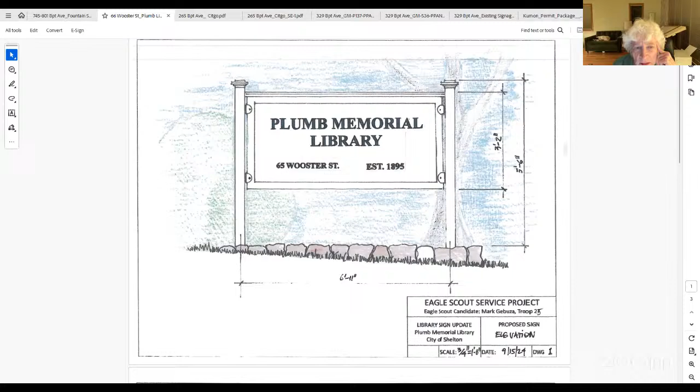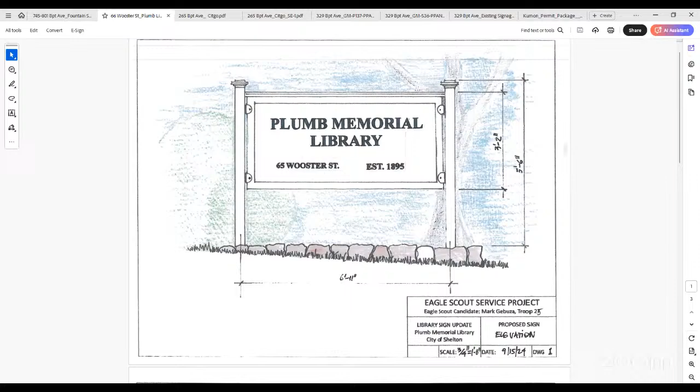Ms. Castro, has a revised layout come in, or has it been conveyed to the Eagle Scout? It was conveyed to the applicant. I've not yet received one. I will note that a revision needs to be submitted to the application prior to approval. Okay, and the other pages with this particular application.

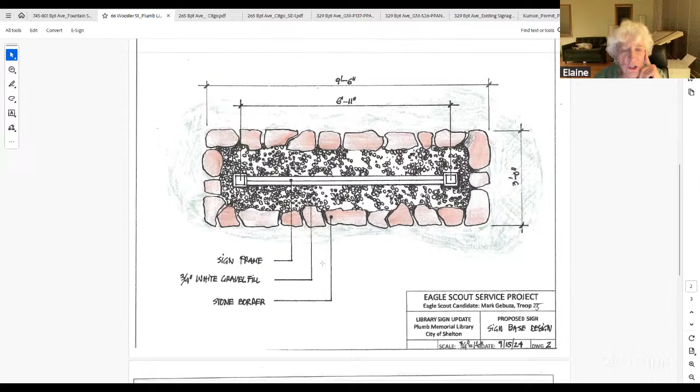Didn't we want to know where it was located? Oh, that's true, yeah. I don't think there was a location shown on the building, on the lawn where it's going to be posted. Okay, is there anybody here from the library? Yes, one moment, I will add in Attorney Bellis, who's representing.

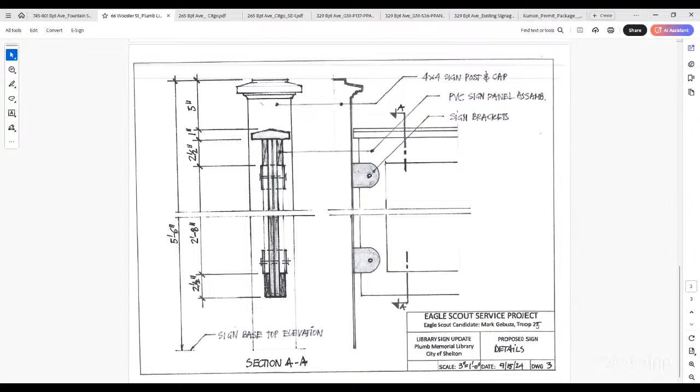Good evening. Good evening, Attorney Bellis. Just identify yourself for the record, please. Sure, I'm Attorney Stephen Bellis. I'm on the Board of Directors for the library, and I'm helping this Eagle Scout with this project.

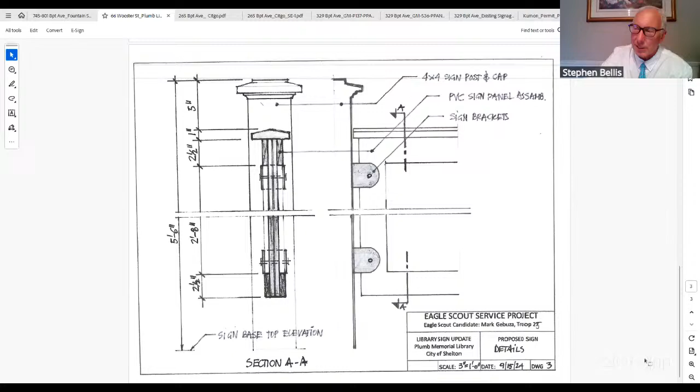He has to have it done by March because he turns a certain age, 18, and then he can't do it after that particular date. So I suggested that he get his application in. I was hoping he'd be on for the meeting tonight, but I don't see him.

I agree with the commission that the number should be on top, and I will tell the Eagle Scout to put the street address on the top. We were hoping this would be a learning experience for him, so that's why I didn't say anything prior to the meeting.

Could you also find out if there's any special reason why we couldn't spell out 'street' instead of abbreviating it? Yeah, I don't see a reason. He's engraving this, he told me. I was gonna ask, is he physically doing this? Yeah, he's doing the signage. Sure, I don't see a problem with that.

We usually just put the number on top, right? Usually, yeah. You know, it's so close to Peary Avenue, it could be a little confusing, so I think having the street name on it is a good idea. Okay, fine, I'll tell him.

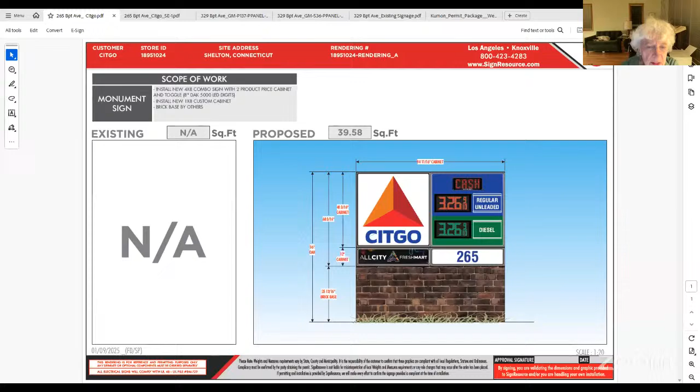Yeah, not a whole lot. I guess we wanted to put that 265 on the top—that's the address apparently—and let them know that All City Fresh Mart, if they wanted to take the whole space across the bottom, that would be okay. That's a good idea, it's a little hard to see.

To tell you the truth, with the 265 down there, at first glance I might think that was the price of gas. Well, exactly, really good point. Yeah, you're right.

Okay, is the applicant with us this evening, Ms. Castro? I do not see them, but they were contacted, and they were going to speak with the property owner and go over the revisions. I have not received them yet.

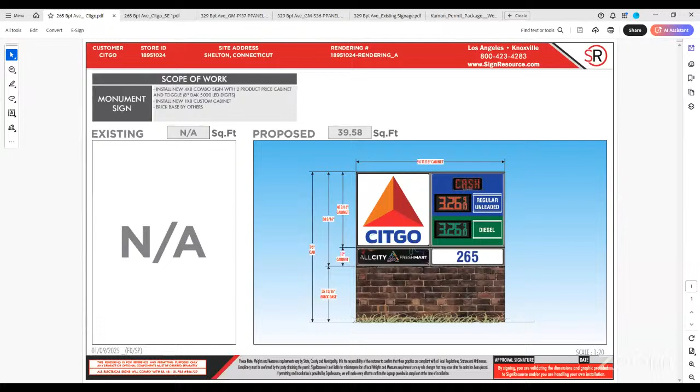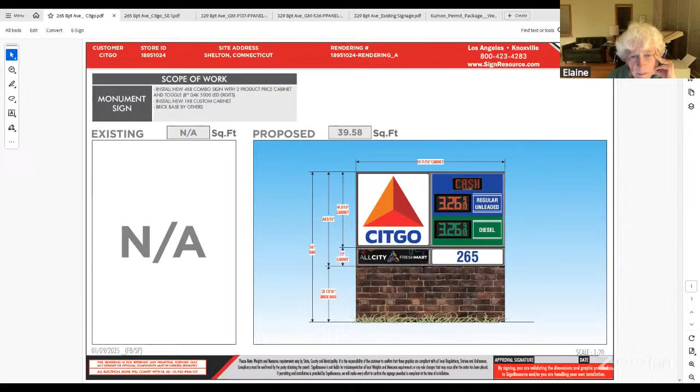So does the commission want to table this? I think so—it seems inconsistent. I think it was a special situation with the previous sign. I think they could make the revisions and let's take a look. All right, so is there someone that wants to make a motion to table?

Commissioner Ticky will motion to table. Okay, there's a motion to table from Commissioner Ticky. Is there a second?

I'll second. Commissioner Morrow has seconded it.

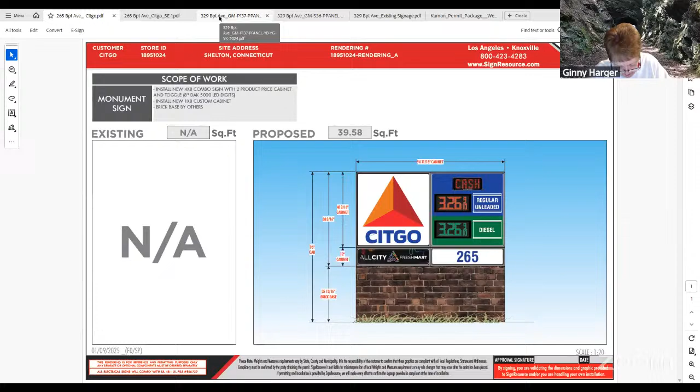All in favor of the motion to table the sign application for Citgo, please signify by saying aye. Any opposed? Any abstentions? Let the record show the vote was 6-0 with no commissioners voting nay and no commissioners abstaining.

Number 5, D'Addario Motors, 329 Bridgeport Avenue. Commissioner Amato: these signs are in the same place, same location, same size, just kind of modernizing the look. I don't know if we have a comparison, but we thought they looked good.

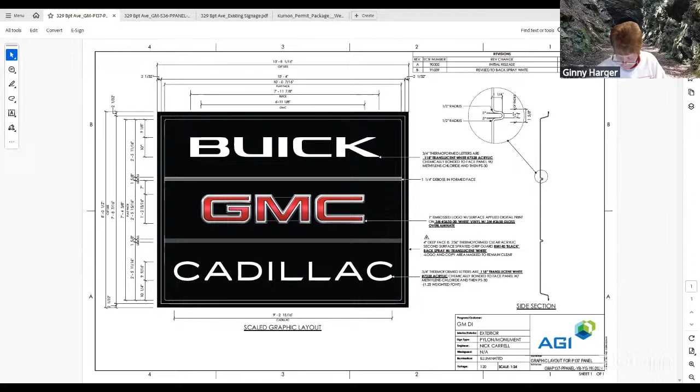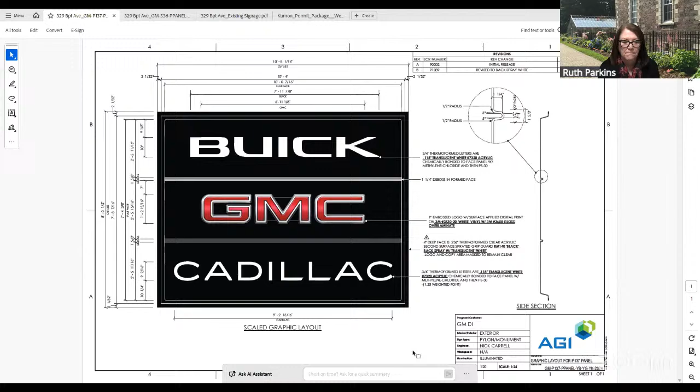There's more than one sign there, I think, right? Yeah, I'm trying to pull up the map to show the reference. This is the first sign. This is the second sign. And I will share the current street view. So they are only taking over what is already existing in these two locations, replacing.

The one that's furthest out to the left, right now there's 4 lines, but now it's only going to be 3. And the one on the right, instead of having all that, it's just going to say certified service. Okay, any questions for staff or for Commissioner Amato?

So Commissioner Amato, was the recommendation to approve as submitted? Yes. Is there anyone that wants to make a motion? I'll make that motion to approve as submitted. Is there a second? Commissioner Ticky will second. So the motion made to approve as submitted from Commissioner Kelly, seconded by Commissioner Ticky.

All those in favor, please signify by saying aye. Any opposed? Any abstentions? Let the record show the vote was 6-0 with no commissioners voting nay and no commissioners abstaining.

Okay, last one, Kumon at 698 to 708 Bridgeport Avenue, and it looks like it's taking up space at 702 Bridgeport Avenue. Commissioner Amato, what's the recommendation of the zoning subcommittee?

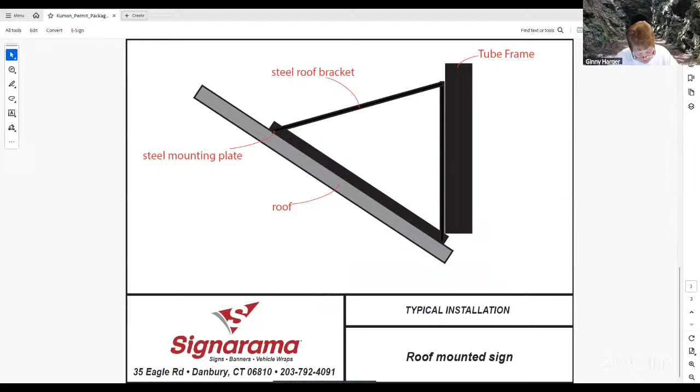I have the applicant added on if you would like to discuss. My recommendation is to take those off of the glass panels, and if they want to have both the phone number and the website, one of the phone numbers on the glass door changes to the website.

It should be fine next to one another on the blue, that's fine. No, on the door, on the white, otherwise we're starting a whole new style. That's too much writing.

The Kumon name is on there 3 times. The phone number's on there at least twice. Well, it's on both doors and in the blue panel. So, yeah, 3 times. Yeah, I agree.

That's enough, and then all the writing there - 'the world's most successful after school learning program' is the one on the left. The one in the middle says 'an academic enrichment program, preschool through high school,' and the one on the right says 'free assessment.'

I don't remember other tenants having this much coverage. Our regulations allow only a certain amount of square glass footage, right? Yeah, I mean if you look to the left of that, somebody's got an awful lot of stuff in their windows as well. I think that's the wine store, isn't it?

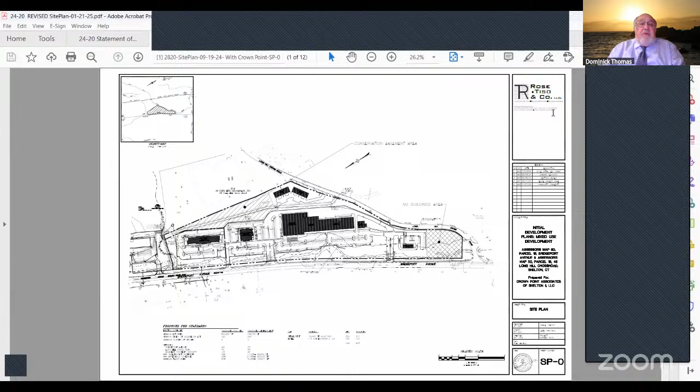I will state that I modified the statement of uses and standards to include the changes that were in the site plan. This is the revised site plan. I just want to blow it up a little bit for you.

To review the significant changes in the site plan itself, the client has agreed to have a no-build area in the pad that was down in this area. The client has agreed, as was explained at the last hearing, these buildings in the center were reconfigured. Pat Rose is here to explain again how it was designed to create a different flow throughout.

On the top area, the revised plan moves the PDD back to the back boundary and includes 8 townhouses, similarly in design to Hawks Ridge, which after discussions with them created, as Attorney McCann said at the last meeting, a buffer that they proposed. I will let you know, and again, Manny Silva and Pat are here to explain.

The WPCA engineers have been going back and forth with our engineers, and we believe we have finally resolved all the technical issues with respect to the relocation of the sewer line. Part of the proposal then says that this crosshatched area here will be a conservation easement to allow it to grow in its natural state, with the only exception being the road, the service road and sewer line that will serve the newly relocated sewer line.

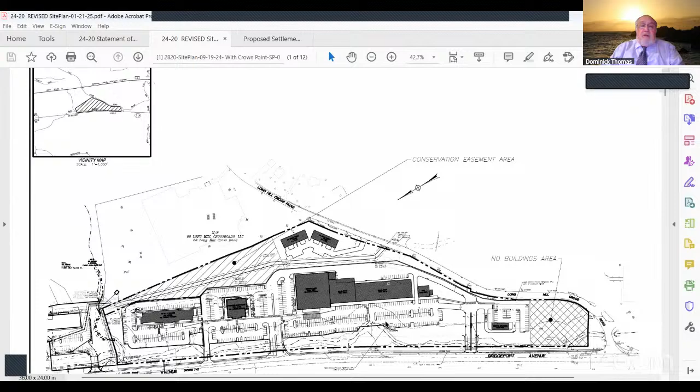In addition to this, there is a substantial buffer planting, as you saw, but most significantly, efforts will be made to go to wetlands in order to have a connection from Crown Point Center into here, which was part of the approval of PDD 48. And that connection would then serve as the construction entrance.

And after a period of 5.5 months from the approval of the final site development plans, there would be no more construction vehicles entering from Long Hill Cross Road, except for the construction of the townhouses. That's basically a summary of the changes in the plans that resulted.

The agreement does have other provisions detailing the time frame to put in the buffer, which is a substantial evergreen buffer, but it does take into account field conditions, such as the fact that we are subject to Aquarian to have the water go on the site, because you certainly don't want to plant landscaping without having water to maintain them. But again, all of these things have been taken into account.

I will also note for the record that we just received and are ready to now file with wetlands. We received the extensive wetlands report from our soil scientists, so we are ready to take the next step in that. And that's my summary.

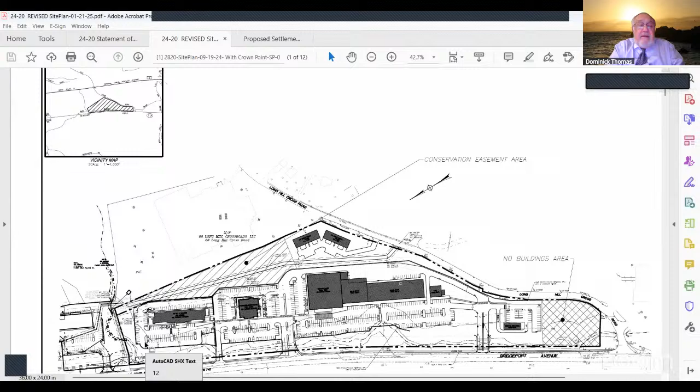I can stop sharing, and certainly if you want a more detailed explanation, Pat is here and he can screen share, and he has the color site plan that I'm sure he can share with you if that's what you wish. Sure. Any commissioners have any questions before Attorney Thomas turns it over to Mr. Rose?

Madam Chair? Yep, Commissioner, go ahead.

Cristiano: I believe an outstanding question from the last time we met on this application was the residential units on the upper portion of the pad, that perhaps the commission was not in favor of moving forward with this application if those were going to be considered. Where are we on that position?

That is something that I agree with. I don't really care for a residential component to this. I understand the logic why the applicant would want it, but I'd rather that whole section up in the back be left, say, in a natural state. And there could be certainly a replacement of a lot of the brush and trees that were taken down to prepare the site. Or it could be used for light industrial as it was intended.

Or it could be, yeah. They said they were going to extend the PDD to the whole piece of property. You're right, that's exactly what they said. So I personally would think if we're going to reject that area for housing, we should have them extend the conservation section through there, make that a permanent part of the PDD.

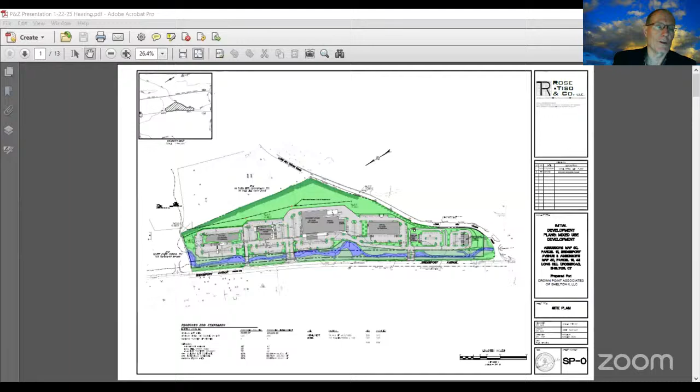Attorney Rose, is there something in particular you want to start off with? I don't have anything specific, but I can give you a bit more definition as to what we're doing. This was the old plan. Let's go back. The old plan has changed significantly.

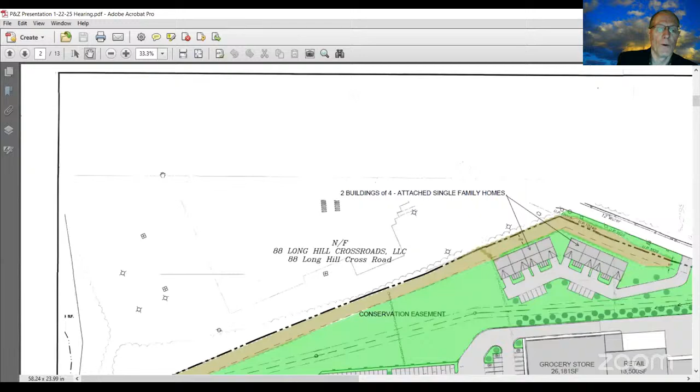What we'd be talking about is this line along here, where we would change from the PDD to the LIP. So this whole section on top would end up being LIP.

I don't know if Dominic has the numbers. We did this calculation previously when we were looking at just making the PDD the back of the retaining wall one time. I don't have it off the top of my head or on the drawings I have with me right now. I believe it's about 4 point something acres, probably between 4 and 5 acres. Yes, that whole rear area.

Where it says conservation easement, all the way to Long Hill Crossroads. What we did is with that area, it's a little under 2 units per acre in the computation, but rounding off to 2 units per acre.

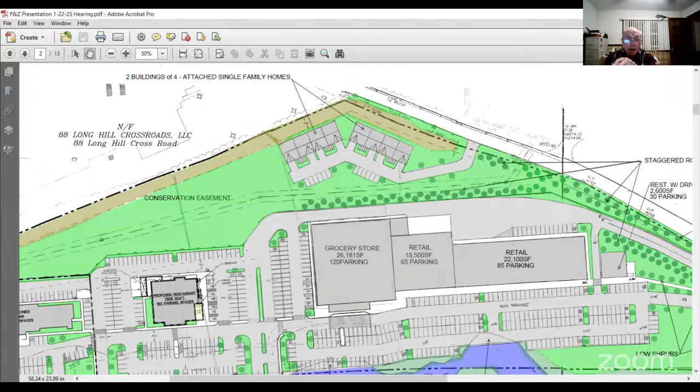The area right or left of this project, is that LIP also? Where it says 88 Long Hill Crossroads. Yeah, that's Modern Plastics, a building owned by Syntec. LIP, right? Oh yes, absolutely, it is. Thank you.

There's another tenant in the front, I believe, in that building as well. Correct, yes. All right, so if there aren't any questions for Attorney Thomas—Mr. Rose, what was it that you wanted to present? We already presented this whole layout.

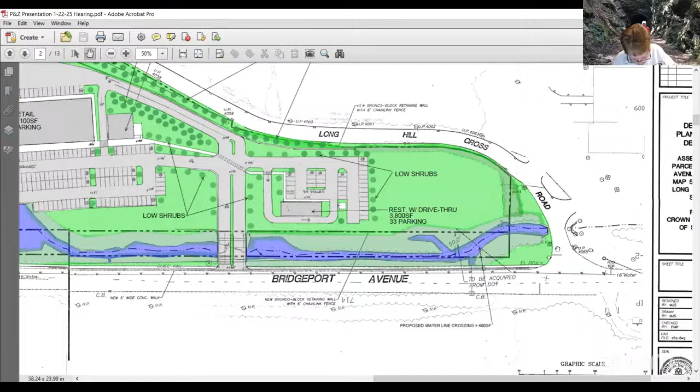One of the things that has changed is that this would become a no-build zone. We're talking about this corner, so that allows this to become green space. There will be some minor changes at Long Hill Crossroads at the intersection.

We have provided a sidewalk all along Bridgeport Avenue, and there will be a walk coming from our pedestrian walk system out to Bridgeport Avenue across the bridge.

Are those areas where you have wetlands filling still needing approval by Inland Wetlands? This still has to be approved, and there's one other area right here that has to be approved as well.

What we're talking about here is the connection to the Crown Point property — there'll be a culvert installed here, which will have some minor disturbance, not filling, so we can have a connection to this hotel parcel.

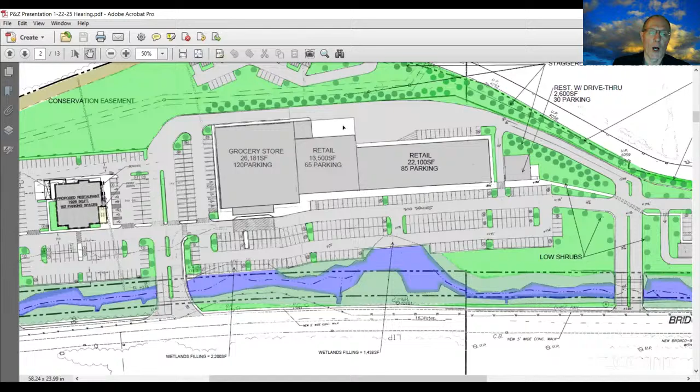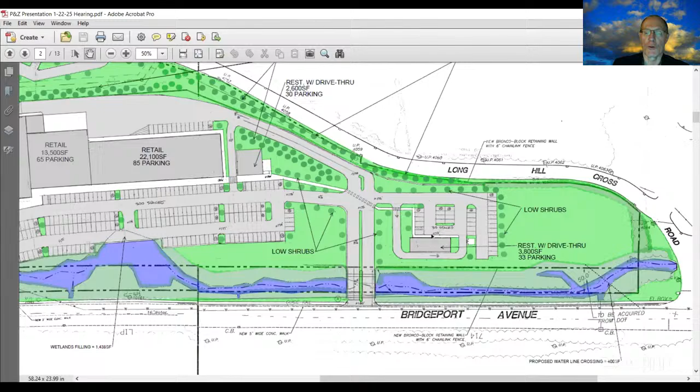This helps us as far as putting all the retail in one spot, putting all the parking in one spot, and gives us more room to provide green space in this location and in this location, since we've also got a small restaurant with a drive-through here. So it really helps the project create more obvious green spaces between different pieces, and I think that's one of the benefits of our discussion with Hawks Ridge.

On that section to the north, can you move your site plan over? For where it would connect to the existing Wild Kanji parking lot, how many parking spaces are going to be lost? Actually none — because it's right after you come over the bridge and there isn't parking in that location. That's good to know.

That was due to the brilliance of one Anthony J. Panico. He designed it back then at a point where it would have the least impact upon the wetlands and that little drainage ditch coming down, and it would come off of the bridge as opposed to affecting the parking, just after the bridge.

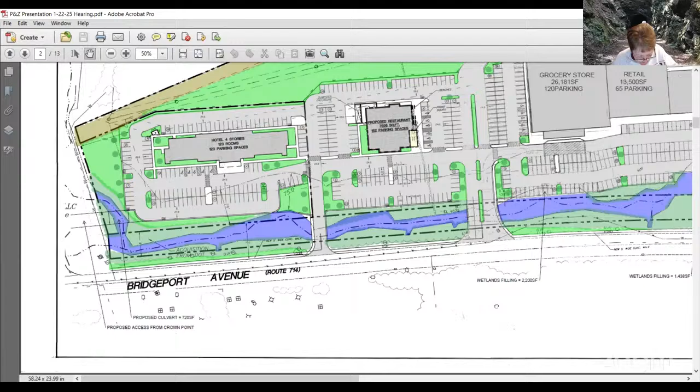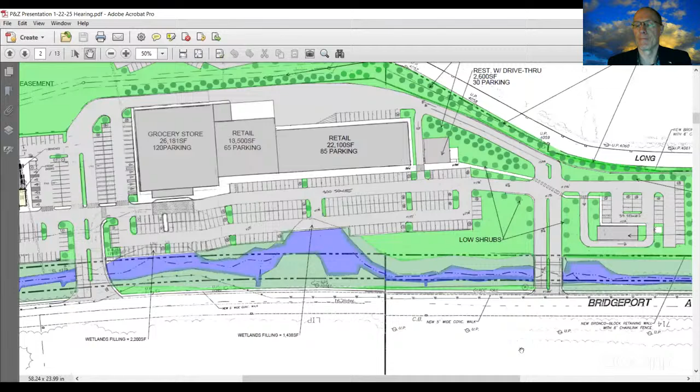So I have no new information to provide other than to try and clarify some questions you have. Okay, any comments, questions, or concerns for Mr. Rose from the commission?

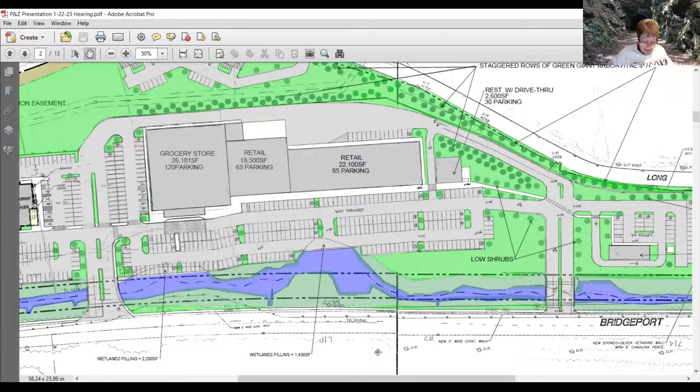Okay, hearing none, we can move on to the public portion. However, there is really no new information that has been submitted by the applicant since the last public hearing on January 22nd. So if there is anyone from the city of Shelton, an elected official that wants to comment, you can do so, but it cannot be a repeat of everything that we've heard so far. So if there is any city official, please use Zoom's raise your hand feature or dial star nine.

None showing. Okay, if there's any member of the public that wants to comment. I am adding in Attorney McCann. Okay, Attorney McCann, you have five minutes. Just identify yourself for the record, please. Good evening, Brian McCann from the law firm Pullman Comley.

I represent the Hawks Ridge Association. As Attorney Thomas said, we have had considerable discussions with the developer, and we appreciate their opportunity to hear the concerns of Hawks Ridge. But I also just want to point out for the commission that, first of all, Hawks Ridge does appreciate the visual buffer and the transitional use that's being made at the top of the hill. But in response to the comment that the commission or the developer is just conceding to or bowing to the demands of Hawks Ridge, I don't think that's truly the case here.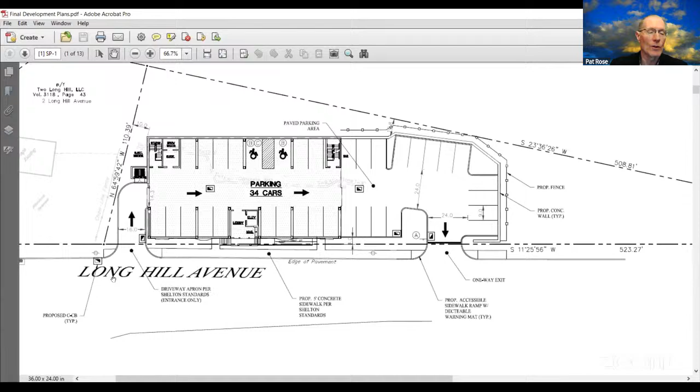What you see before you is the site plan for 12 Long Hill Avenue, very similar to the site plan we came in with for initial development approval, where we have a building substantially smaller than previous buildings we showed. There are 17 apartments in the building, and we have 34 parking spaces underneath the building and outside it. The circulation is proposed as one-way in, closest to Long Hill Avenue near the side street, then coming back around and out further away, which will help with stacking issues.

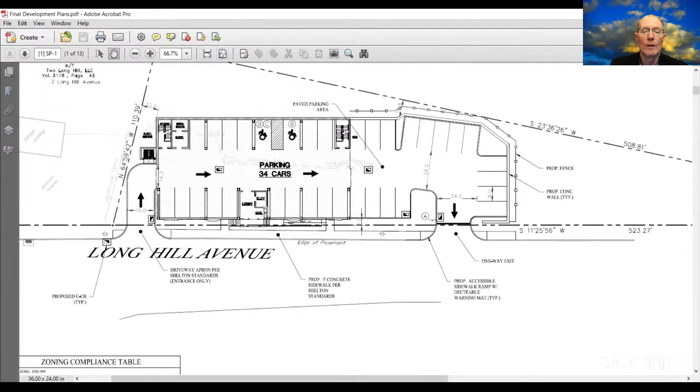We have done a set of site plans, drainage and the like, which I will have Manny Silva go through in a couple minutes. I'll just go back to the building to show you that the layout has not changed from our initial development plans.

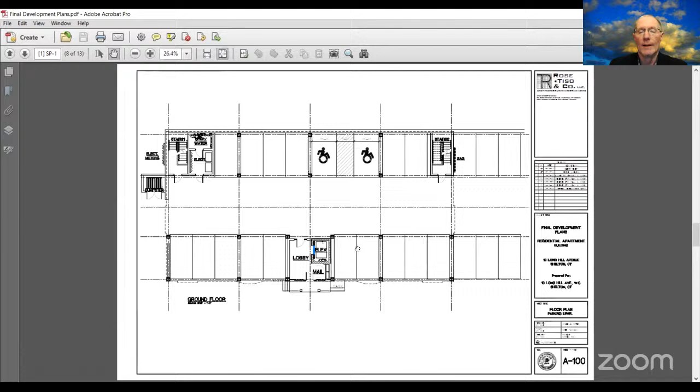We have parking underneath, an electric room, water meter room, stairs on either end, a lobby off of Long Hill Avenue with mail, elevator, and entrance from the parking area. We have the same apartments we showed, with the first floor having an office and a fitness center in an area that's subterranean, underground, because there's a substantial retaining wall in the rear of the building.

All of the units are 1-bedroom units. They range from, say, 820 square feet to 841. The biggest one is 924 because it's got this little piece next to the elevator, which makes it a little bigger, probably a little home office area.

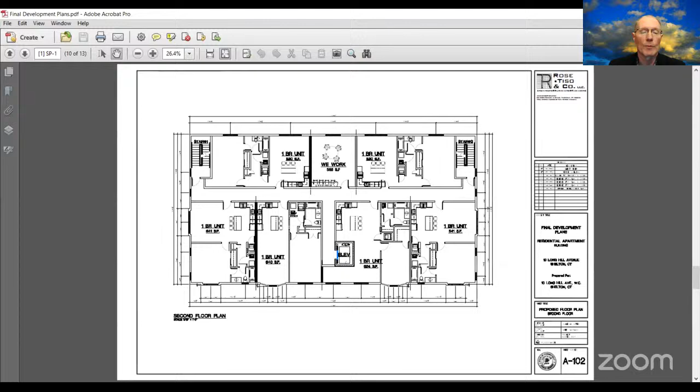Second floor, we have all apartments. In the center, there's a WeWork room that's provided, with the same apartment layouts around the elevator. Third floor, same apartment layout, except there's a lounge on that third floor.

Dealing with the grades, this building has a 5% grade inside the parking area to a flat section where we have accessible parking spaces, then 5%, and then you come around and exit out here. The trash enclosures can be directly accessed down the driveway. We've provided grillage at that parking level area.

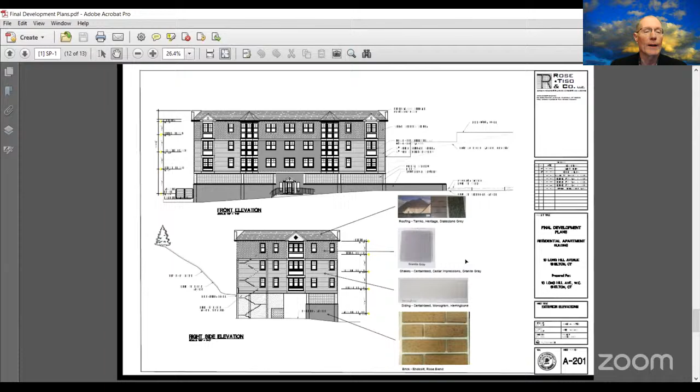The lower section is going to end up being brick—we've shown a brick. We're using a rose-colored brick on the lower section. The vinyl siding will be herringbone, a light gray siding in this location, and the shakes will be a darker gray, granite gray, with a gray and black roof on top. So we've shown what we're proposing for siding and exterior finishes.

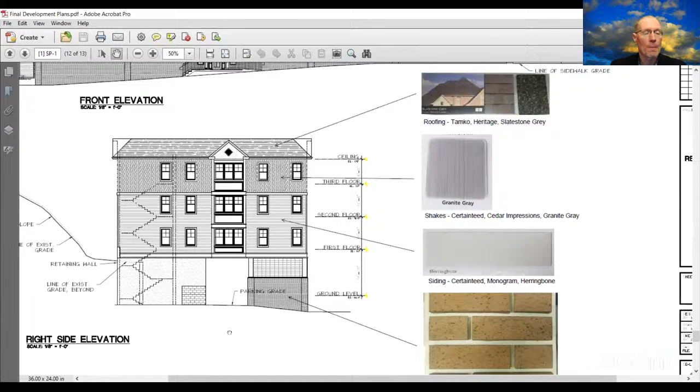This elevation is as you enter in off Long Hill Crossroads into the parking area, and you can see the slope behind the building. We've added screening plantings at the top of the slope, which was one of the comments from neighbors trying to screen the building from the upper road, High Street.

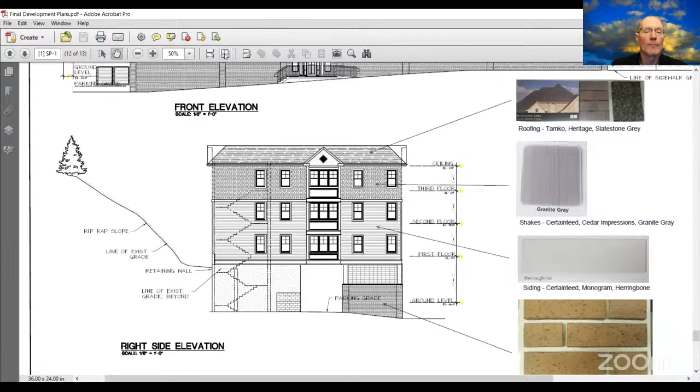As you can see, the rear of the building has a slope that goes from a full story up to almost two stories on this side. So you can see this as you exit here going out to Long Hill Avenue.

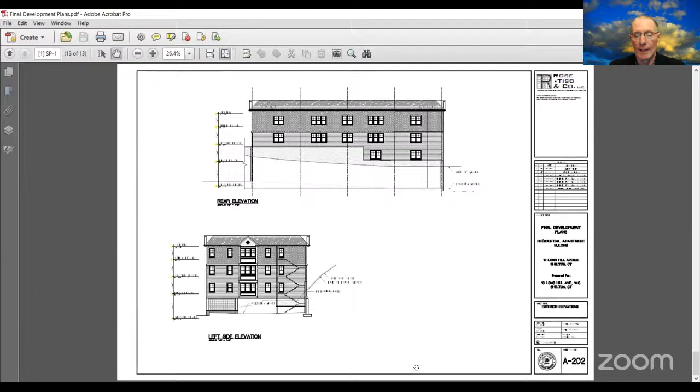I'll stop sharing. I believe Manny can share his own and let him go through the site development plans.

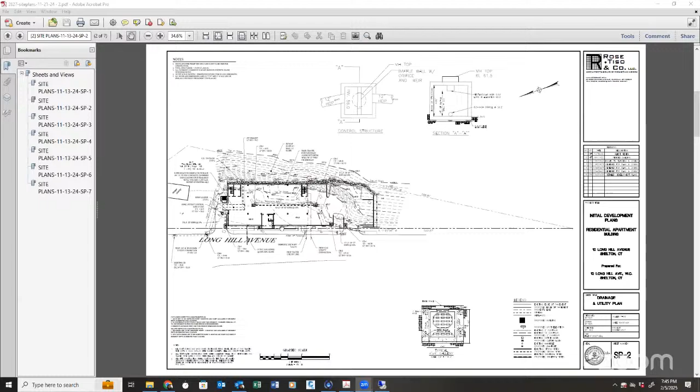Good evening, Commissioners. This is Manny Silva from Rose Tiso & Company, registered civil engineer in the state of Connecticut, 35 Brentwood Avenue, Fairfield. As Mr. Rose was detailing, the building itself is an existing site that had some existing buildings, kind of like a little office, and then some construction uses—they had construction trucks and things of that nature, some piles back here. But in general, the property has a steep slope up to, I think it's Hill Street up here.

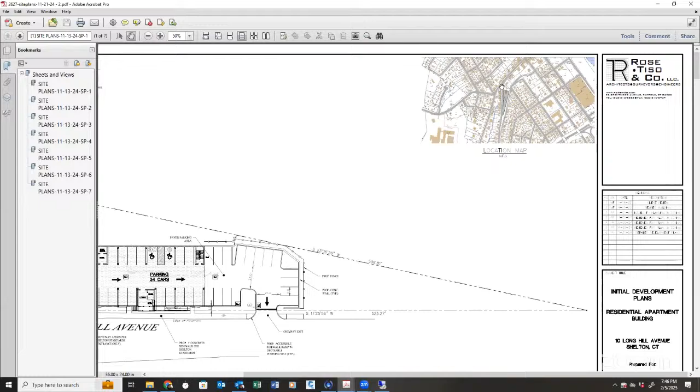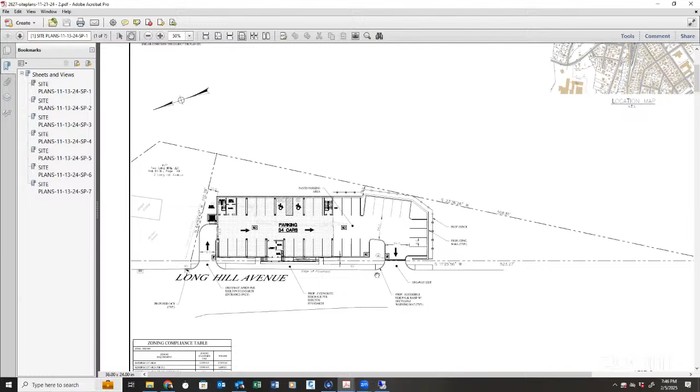Let me just go back one—I think it has the location map. Yep, the property itself is kind of a wedge as Long Hill Avenue comes into Center Street. What you have is basically a one-way circulation. People could come in underneath the covered parking—there's 34 spaces total—and then come out further away from the intersection, and then can go down and back out to Center Street.

The drainage right now is basically that the site has some catch basins on site that are directly connected out to Long Hill Avenue and then into the brook that passes underneath Long Hill Avenue here and down out to the Housatonic River behind Porky's.

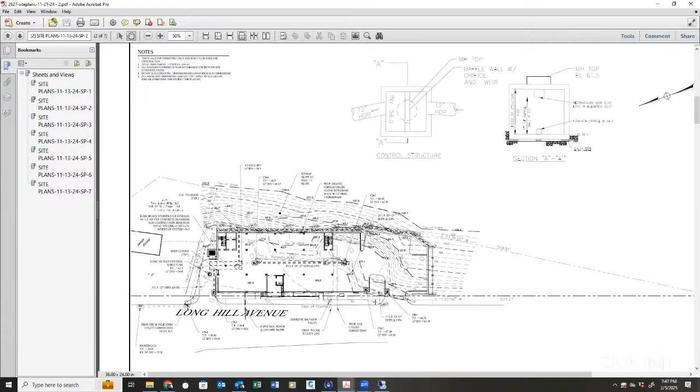What we have is we'll actually collect all our drainage under the building and on the roof, and put it into an underground gallery system. We have approximately 64 lineal feet of 4x4 gallery proposed here underneath the building in the parking area. What that does is we'll have snouts in our catch basins to collect any floatables, oil bottles, things of that nature, and then our roof leader will connect directly into the galleries, as that is clean water from the roof itself.

From there, there's a control structure, as you can see here. The water will back up into the gallery system and not go out into the street, except for a small controlled orifice at the bottom, which is a 6-inch orifice. And then at the top, we have a high flow overflow to control the flow at the 100-year storm.

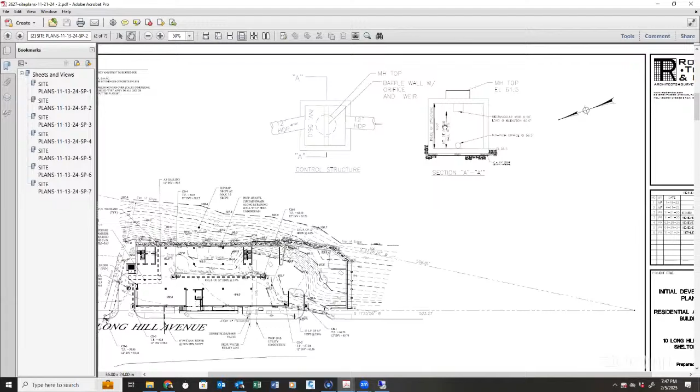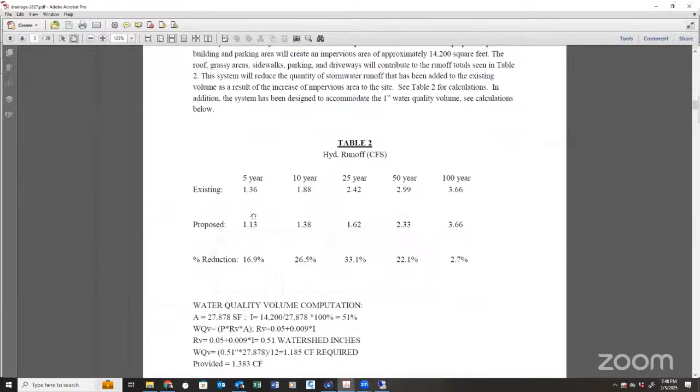So we'll be collecting the majority of stormwater on site in the gallery system. The existing discharge numbers range from the 5 to 100-year storm. We have a reduction of 17% at the 5-year storm, 26% at the 10-year storm, 33% reduction at the 25-year storm, 22% reduction at the 50-year storm, and a 2.7% reduction at the 100-year storm.

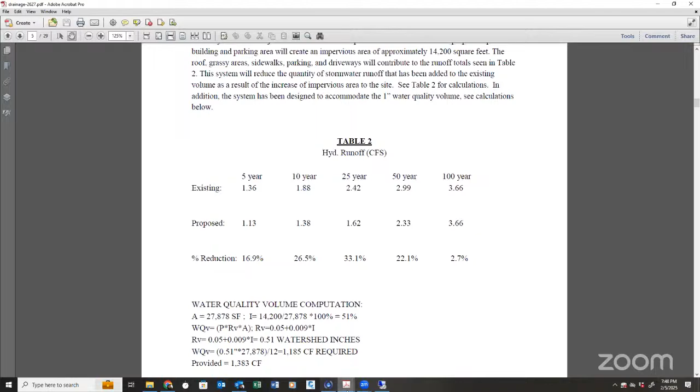So we meet the DEP's water quality volume requirements, and we meet the town's requirement to have reductions at all storm events. We also meet the state's MS4 requirement, because the site right now is completely connected to the town drainage system, and we are taking it 100% offline with our drainage system here.

Next is our soil and erosion control plan. Since the site is on the plateau portion below and there's a hill above, we put silt fence on the hill above. We don't anticipate a lot of sediment coming from there because we're going to leave that area natural. Then we have our retaining wall going in here with drainage on the surface, kind of a curtain drain to pick up water coming off the slope so it doesn't spill over the retaining wall, which will also be collected into this system. And we have silt fence along Long Hill Avenue, and a soil stockpile area surrounded by silt fence.

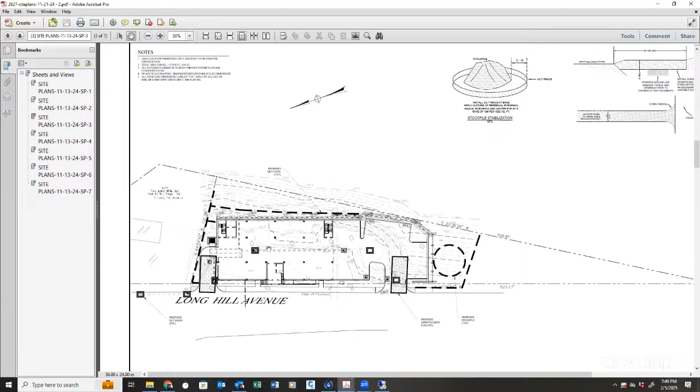We have two anti-tracking pads to take the mud off the wheels of any construction vehicle coming on and off site. And then we have silt sacks in all the catch basins, and the ones out here in the road, to protect against mud or any stormwater with suspended solids, which will filter it out before going into the basin itself.

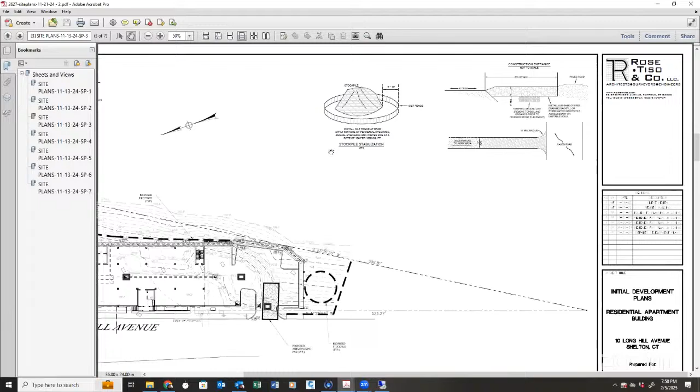We have our construction sequencing here, our silt fence detail here, the anti-tracking pad here, and here's our stockpile detail, with silt fence basically around the pile itself.

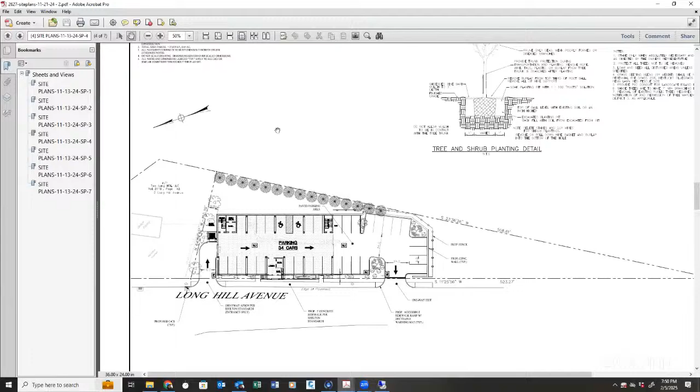And then we have an ornamental landscaping plan. We are going to put some evergreens on the uphill side of the property to screen the upper parts of the building. These trees will be much higher up on grade, so once they reach full growth, they'll completely screen the building from the uphill side, from Hill Street.

What plants are those? Those are arborvitae. Yep, arborvitaes, and then we have some Austrian pines going in here to screen the side of the building from Center Street. We have some behind Sierra Suites too, that's something we used back there.

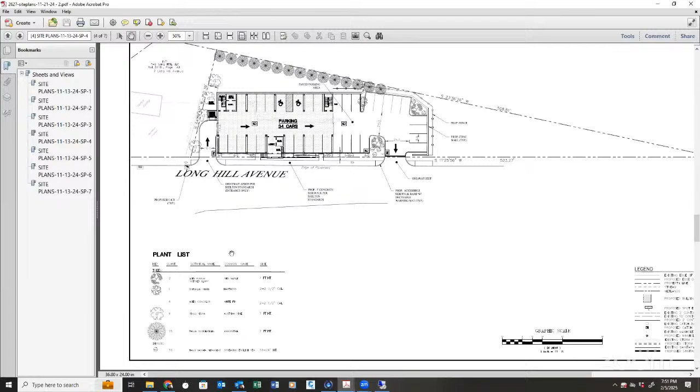Could we substitute those for native white firs, or something like a white pine? White pines would get too big and drop their bottom limbs before you know it, so they're not really good for screening. Maybe cedars, something else? Yeah, like a red cedar. We'll do red cedars.

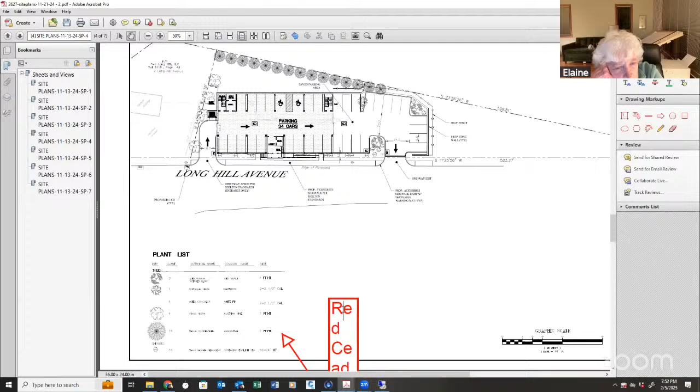Was any environmental mitigation required on this property due to previous uses? Do you know if a phase 2 was done? There was some environmental work done, I can't remember if anything got turned up.

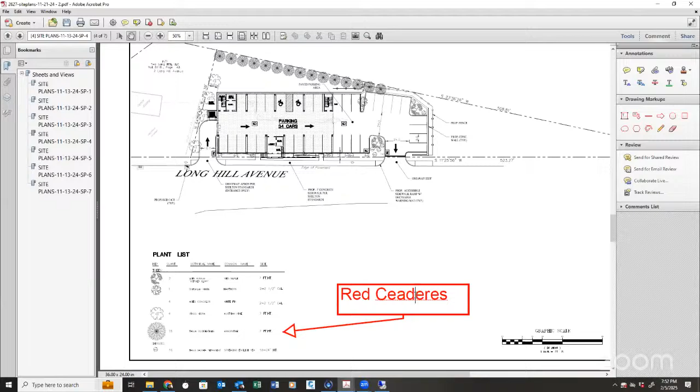I murdered that word. Oh, you were trying to do a Latin version there. I can revive a dead language. I think I remember seeing monitoring wells on the property, so there must have been some kind of environmental investigation. Remediation taken care of, yeah, I think everything was taken care of.

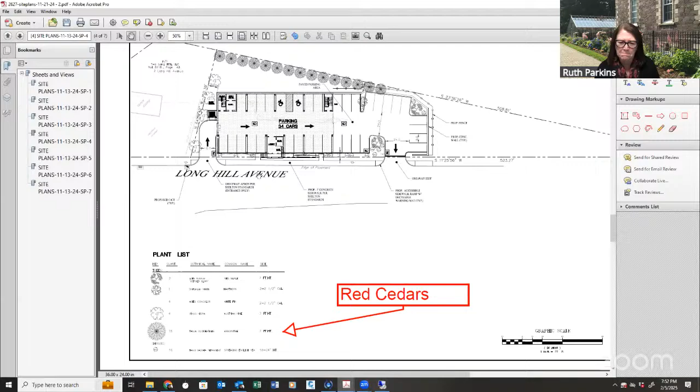So I think that was done by a previous owner of the property. Are the wells still being monitored? I don't think so, I think that's been mitigated, so there's no longer a need for well monitoring. But I haven't looked into it, I can't tell you for 100% because I haven't seen the LEP report.

Is there any documentation anywhere as to what the previous occupant of this particular parcel was over the years, and what kind of business was here? Because all I remember are some buildings, but I don't know what it was used for.

I remember a landscaping guy from growing up in town. Yep, Pepper's Landscaping. Let's go back to 1928. There was a construction company, and an environmental company too. What's that October 2008 date on the screen now? This was someone called GMC, or EMC - Alternative Global Energy Laboratory.

So it was a lab. The garage was turned into an office of some sort for EMC. And then at some point it was for sale - that was 2016.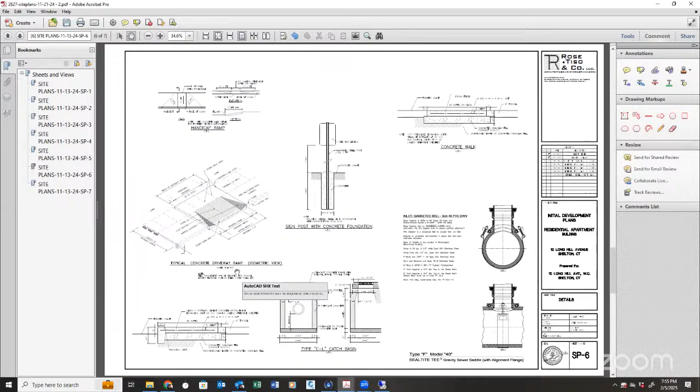We have our standard details - sewer connection, concrete sidewalk out front, handicap ramps, and this is our soil and erosion control, construction sequencing, and details. If there's any more questions, I'll be happy to answer them.

And we'll definitely change these arborvitaes to red cedars. Thank you, that's not a problem.

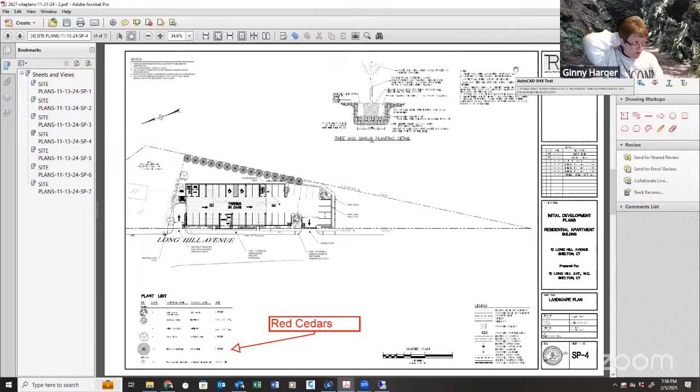I know Attorney Teodoso is still with us. Attorney Teodoso, if there was something where there was more of an industrial use on this property back, say like 30, 40 years ago, is there any cause for concern? Well, yours is the zoning decision. What you're asking about is really an environmental issue. There has to be environmental compliance with the property in order to get financing, in order to have everything cleared through DEEP. There might be limitations on the property placed there by DEEP based on what's in the ground - sometimes you can't have residential property developed because of what's below the ground, but that's handled by DEEP, not by planning and zoning.

Would that be recorded on the land records? Yes, so a title search would show that - that's correct, it would be absolutely permit driven. It would also - the Transfer Act of the state of Connecticut - if the property was being transferred, it has to be cleaned before it can be transferred to another owner. Correct, but that operates outside of planning and zoning, through DEEP in applications and permits.

So when the current owner obtained this property, that issue should have come up at that time. Well, if it didn't, and the current owner tries to get financing, it's going to come up real fast, especially if there was any kind of monitoring going on. There's a parking garage going on the first floor, so there's not residential being built right on top of it, but still.